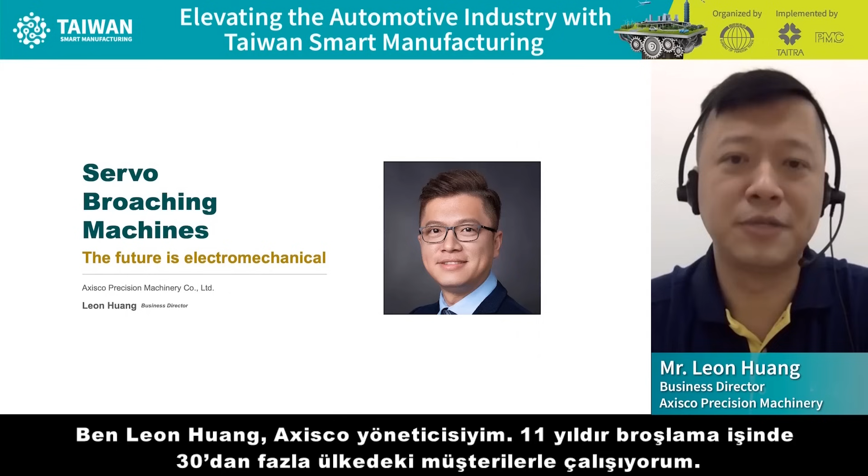Axisco was established in 1984. Now the total area of the headquarters is about 5,000 square meters, located in central Taiwan. We can build several lines together. The models of the hydraulic broaching machine are from 3 to 80 tons. The models of the servo table-up broaching machines are from 5 to 40 tons.

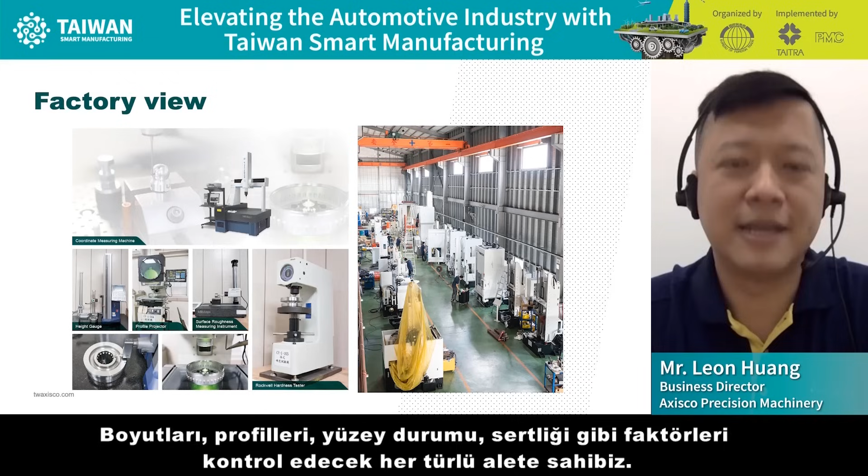In broaching machine, customers approve the parts rather than the machines. We have all kinds of instruments to check the sizes, profiles, surface finish, hardness, etc. We are partners of the suppliers for worldwide big names in automobile, tools and hardware, and aerospace industries.

Axisco's headquarters is in Taiwan. We have a branch office in Michigan, US, and sales channels run by dealers in more than 30 countries.

How to make these shapes? If you are going to make these parts, what method will you use, and how much time does it take? Broaching will be your best choice. It can be used to make round holes, splines, keyways, 6-bolt grooves, square holes, hexagonal holes, special shape holes, helical teeth, etc., quickly and precisely. High level of customization is possible according to various requirements.

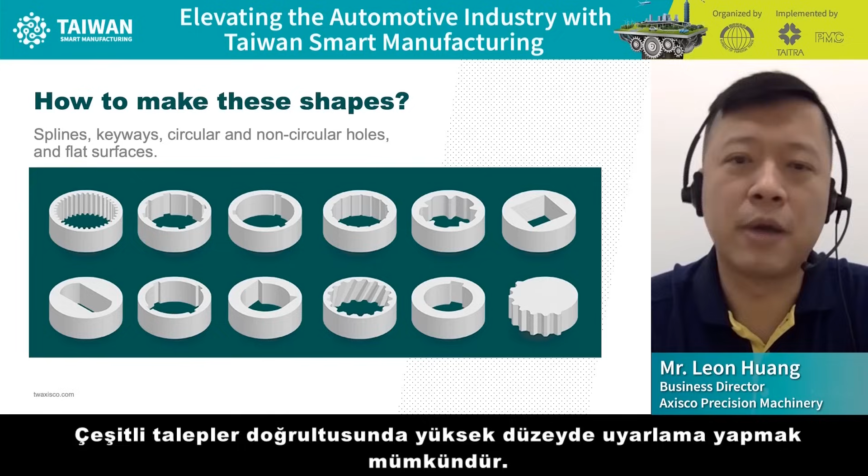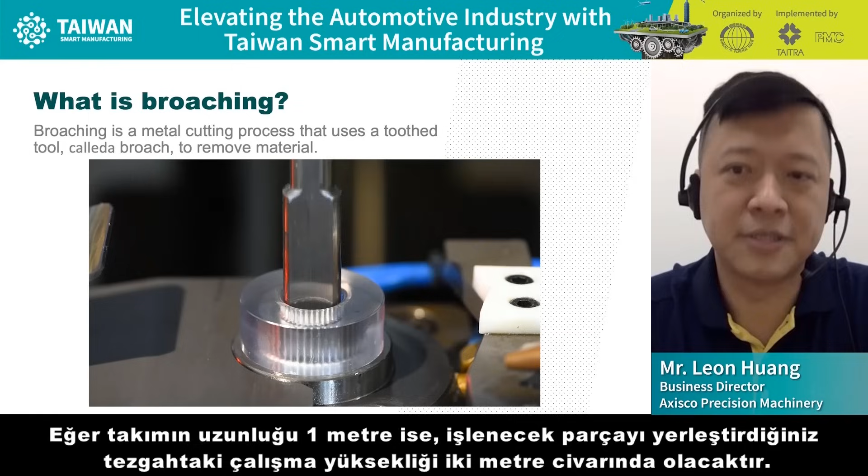What is broaching? In this video, we use a transparent sample to show how the broach tool cuts the spline. The broaching needs to be performed by a broaching machine with a broach. This is a traditional hydraulic broaching machine. The tool moves down during broaching. If the tool length is 1 meter, the working height where you put your workpiece will be about 2 meters, as there has to be room for the tool to go through and space for the pulling mechanism and chips.

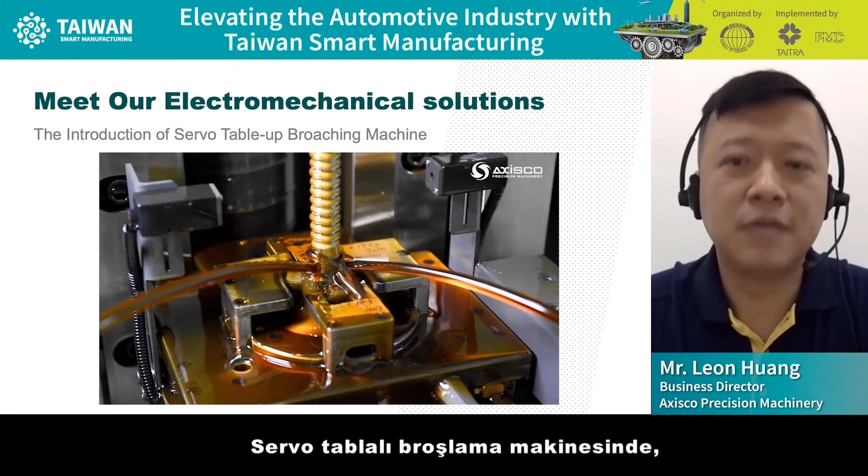Nowadays, people prefer more advanced solutions in every aspect, including broaching. Now, almost 80% of our broaching machine sales is servo table-up broaching machines, the electromechanical solution for broaching. In a servo table-up broaching machine, the tool does not move during cutting, and the working table drives the workpiece to move upward to complete the broaching, as shown in this video.

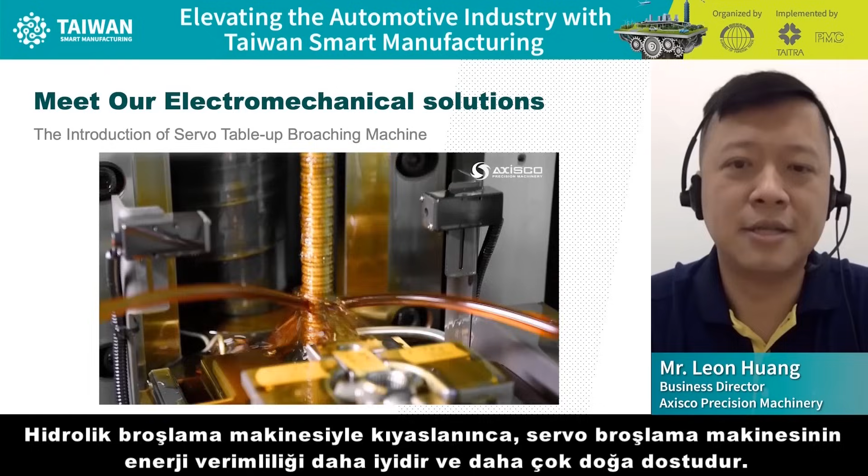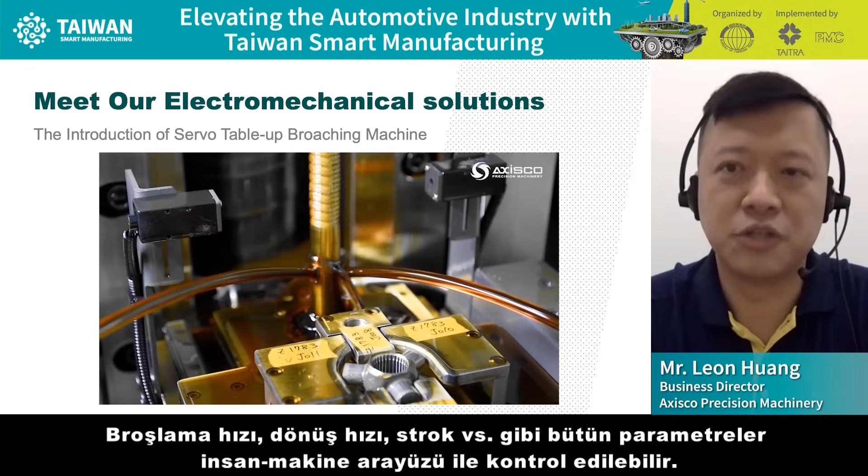This equipment uses electricity as the primary source of power. Compared with a hydraulic broaching machine, a servo broaching machine has better energy efficiency and is more friendly to the environment. All parameters, such as broaching speed, return speed, and stroke, can be controlled through the human-machine interface. The operator only needs to stand on the ground to operate, without digging a pit or standing on stairs. Here we can see the before and after parts.

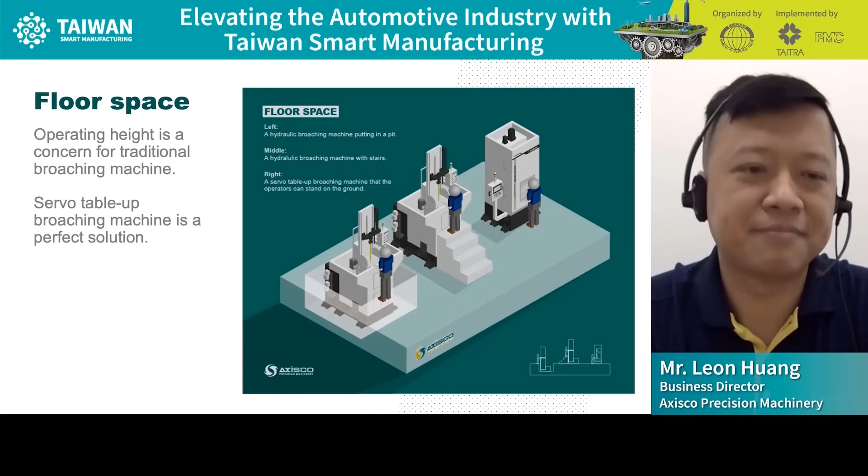In servo broaching machines and hydraulic broaching machines, the dimensional tolerance is all precise. However, if the geometrical tolerance is critical, such as runout, the servo broaching machine provides more stable results, as the broach retriever holds the broach to reduce vibration during broaching.

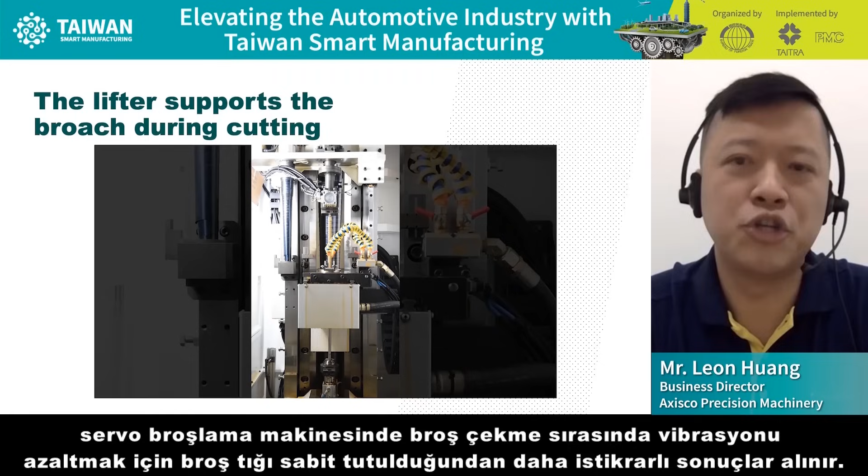The program is 100% made by Axisco. On the right side, the yellow digits tell you the lifter's current position and the job slide, the working table position. The touch panel can operate all the functions on the left side, and the status of the sensors is shown in circles. On the top of this graph, you can save the part number with the tool number in the memory to adjust for the first time. In the future, you just have to recall the memory to start the production.

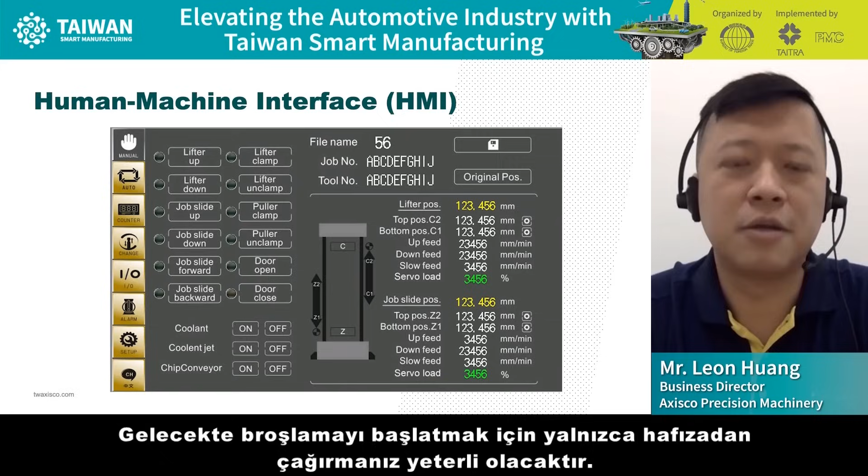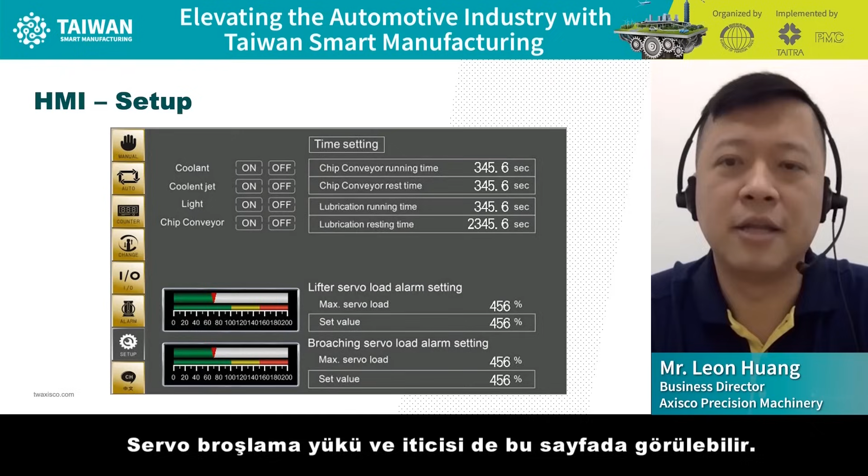The on and off of the coolant pump, tool cleaning pump, light, chip conveyors, and lubrication is a one-touch setting. The servo load of broaching and the lifter are also visual on this page.

Let's make a conclusion to this presentation by looking at the advantages. The working height is the same as other kinds of machine tools. You don't have to put it in a pit or use the stairs for operating the machine. The integration of automation is super easy.

The machine is with a servo motor and ball screw. It performs consistent broaching speed, low vibration, and increases the tool life by up to 20%. Compared with the traditional hydraulic machines, the electromechanical design saves up to 40% electricity. This is because the motor didn't consume power when there is no load.

Even during cutting, the motor only gives the required load, just like how advanced air conditioners save energy in your house. A traditional hydraulic broaching machine is like the old air conditioner that always runs in full load, consuming unnecessary power. If the geometrical tolerance is critical, such as runout, the servo broaching machine provides more stable results as the broach retriever holds the broach to reduce vibration during broaching.

The human-machine interface makes it easy to operate and diagnose the machine. Everything is visualized. Broaching speed and the stroke can be adjusted and saved in the HMI. You can save it in the system and only need some clicks on the touch panel to set a new tool.

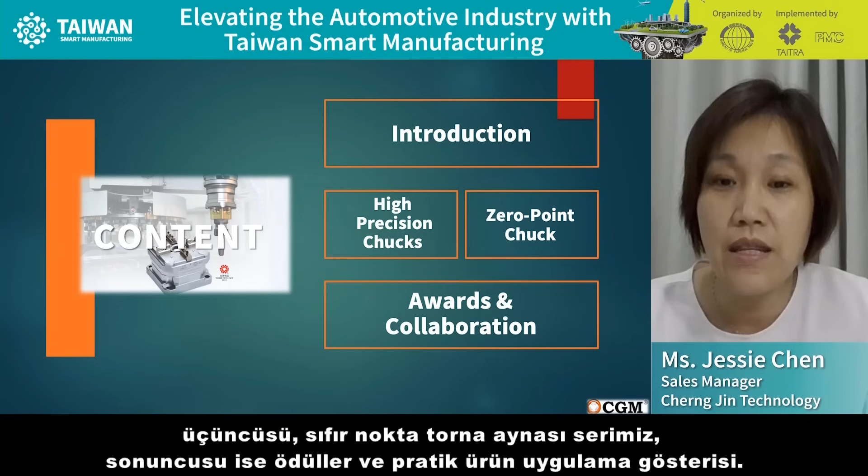In this online introduction, I will divide it into four main sections. Firstly, the brief introduction of company profile. Secondly, the high precision chucks. Thirdly, our zero-point chuck series. And finally, the awards and practical products application demonstration.

We used to be mold makers and knew exactly how important the work holding and clamping products are to the accuracy and efficiency of finished goods. Therefore, we created the clamping chuck in 2004 with 2 microns repetition accuracy, and it can also be compatible with other reputed brands worldwide.

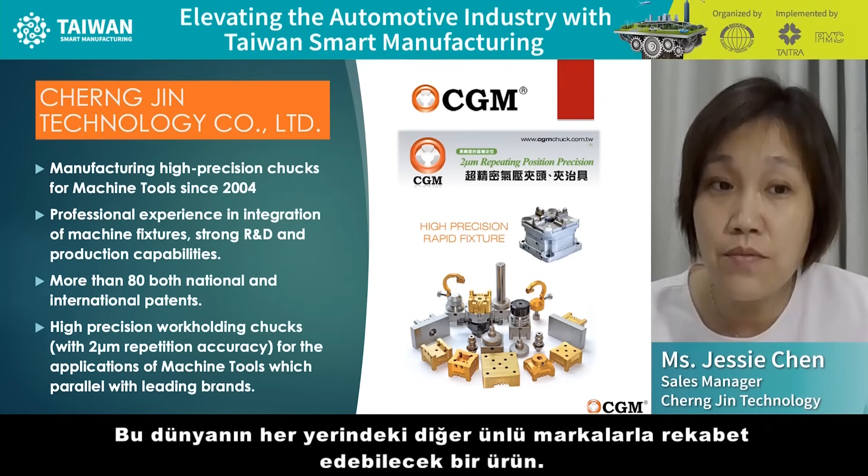Later on, we will show you how our products can be compatible with other brands. Here is the first part, Product Series 1, Workholding Chuck — how our product can be applied to your machining jobs.

There are 3 basic components to the chuck. First, you need to have the workpiece holder, component A as the picture shows on the left. Then you need to have the spigot as component B. And C, you need to have the main chuck.

About the main chuck, our options include manual, quick manual, or pneumatic type, depending on your machine and how you would prefer to operate. As for the workpiece holder, or so-called electrode holder, we have various sizes to fit your specific workpiece requirement.

Next is our product series 2, the zero-point chuck. The general repetition accuracy of our zero-point chuck is within 5 microns. If you are looking for more accurate tolerance, like 2 microns repetition accuracy, we can customize the chuck without problems.

This image demonstrates how you could process bigger size or heavy loading workpieces. We have multiple pallet sizes with 2 chucks, 4 chucks, 6, 12, and 20 chucks available for your choice.

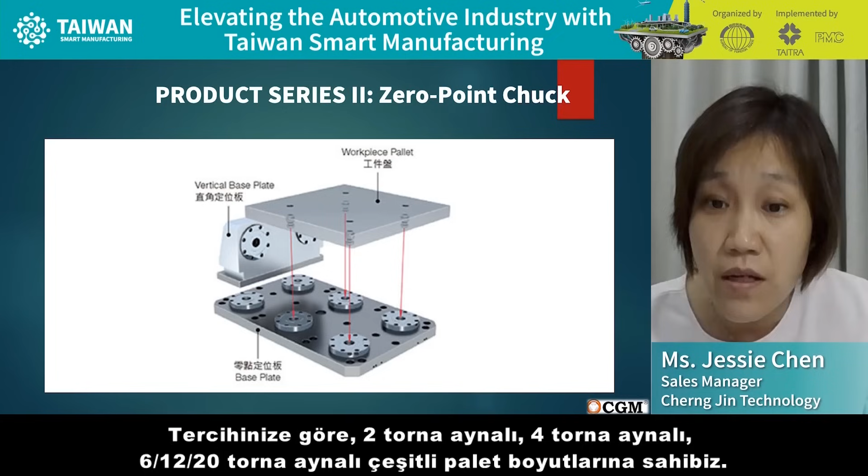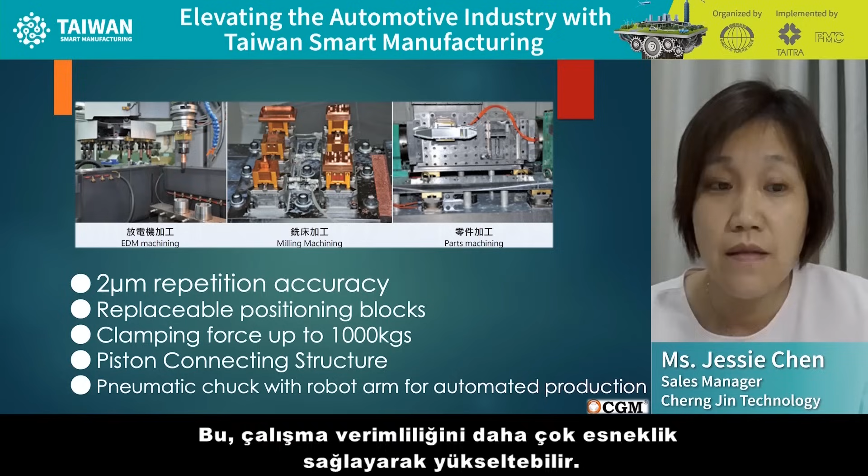Let's move on to the application for machine tools. From this slide, we can see clearly how our clamping chuck can work for all machine tools and make sure the workpiece has consistent accuracy. Consistent accuracy is extremely important for machining jobs, right?

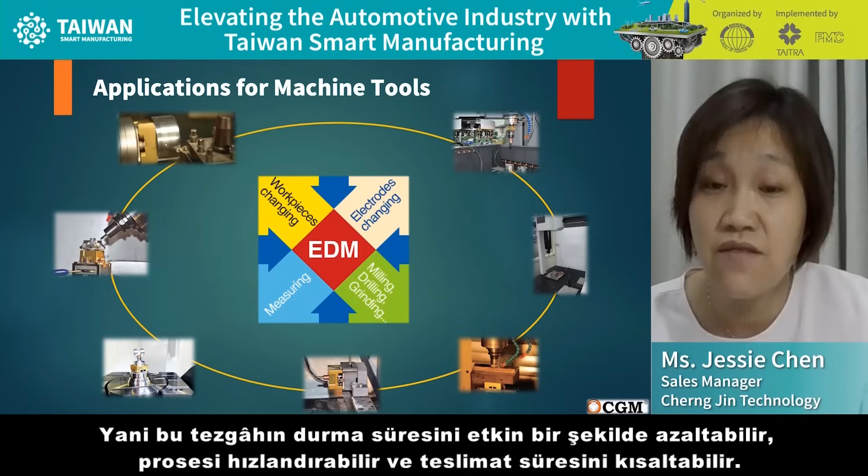So from lathe machining, milling machining, grinding machining, or EDM machining until the last step, measuring, the loading and unloading job can be operated easily with the guarantee of repetition accuracy of 2 microns. It could effectively reduce machine downtime, speed up processing, and shorten delivery time. This is extremely important.

As everybody knows, Taiwan's machine tool industry is reputed in the world. So most reputed manufacturers of machine tools in Taiwan choose to work with us, CGM Chuck, because they can integrate their machines with our chucks to have better performance on machining jobs.

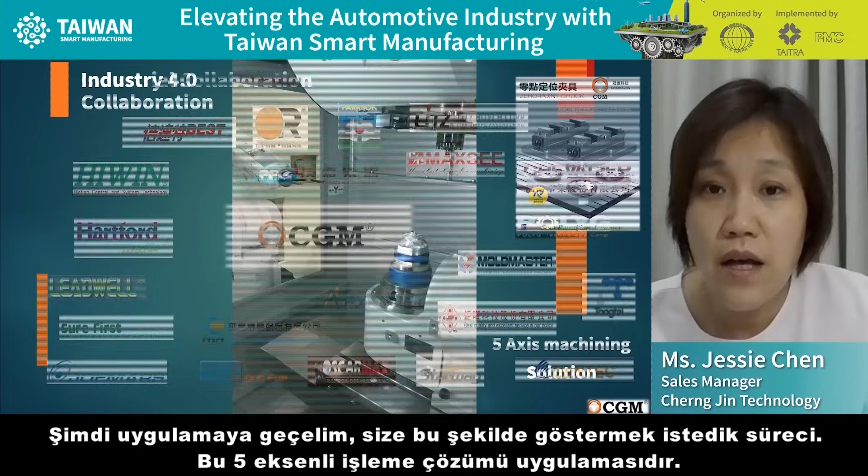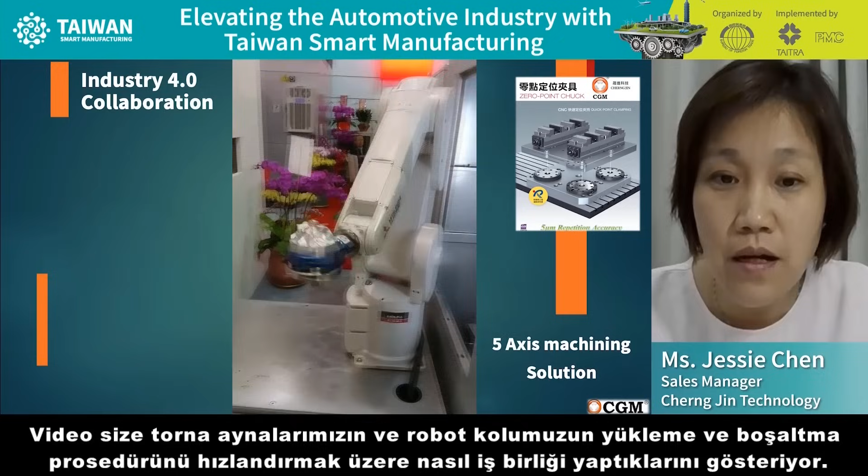Let's move on to the application. Here we are going to show you a demonstration. This is the 5-axis machining solution application. The video shows how our chucks and robot arm can operate together to speed up the loading and unloading procedure. As you can see, the robot arm can easily take the workpiece, loading and unloading within seconds. It will shorten the working time effectively.

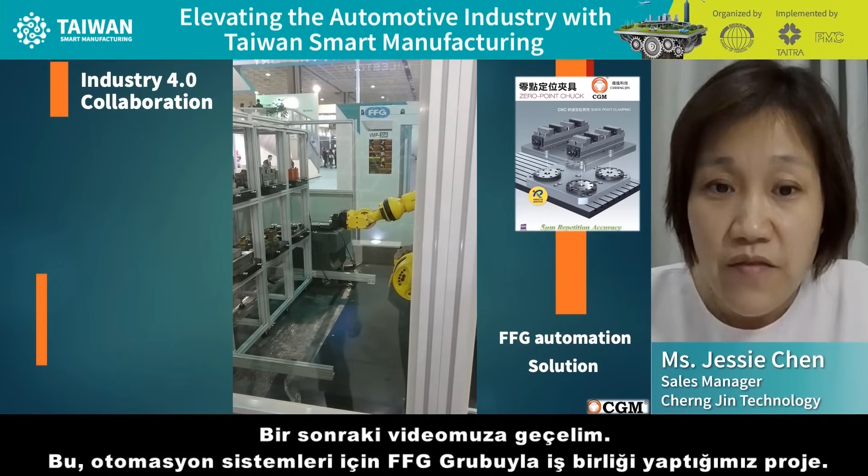Next, we move on to this video. This is the project we cooperated with FFG Group on for their automation systems. They use our zero-point chuck with the robot arm and set up several working stations so that the work can be done 24 hours a day, 7 days a week, 365 days a year. It improves work efficiency and removes the worry about labor shortage.

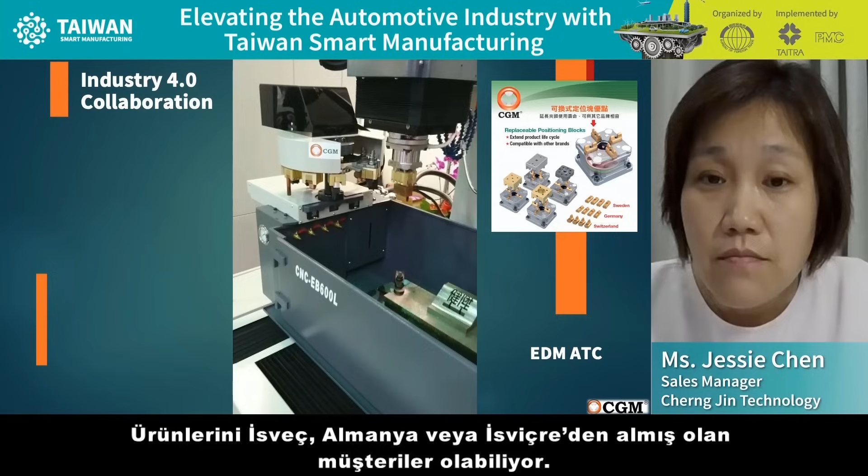Next is the application video about EDM machines. As everybody knows, for reputed EDM machines, customers may be using Sweden, Germany, or Switzerland brands. They already have hundreds of sets of electrode holders, but our CGM chuck can be compatible with their brands. As you can see from the pictures, our positioning blocks can be changed and be compatible with 3 other brands.

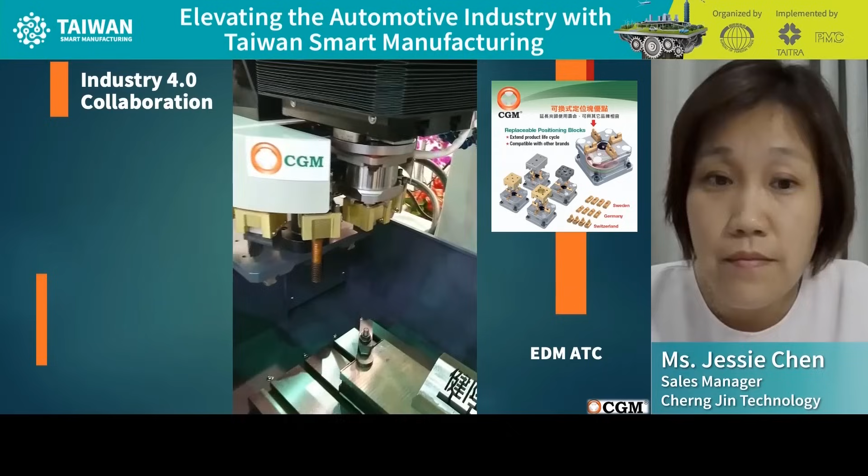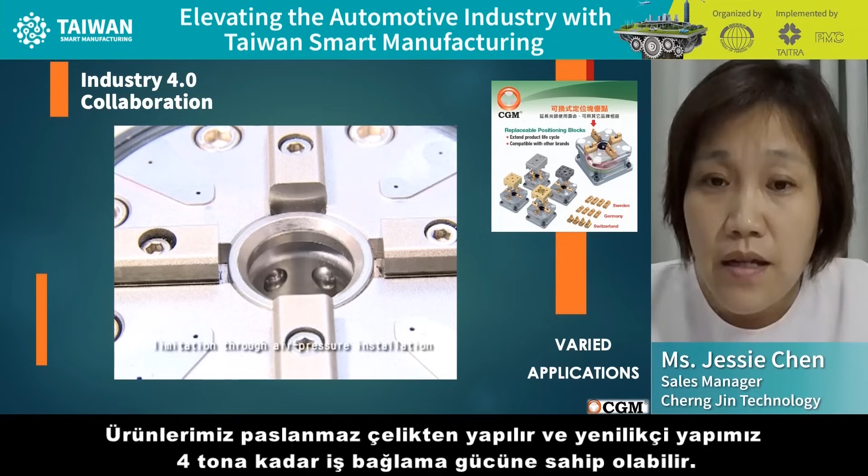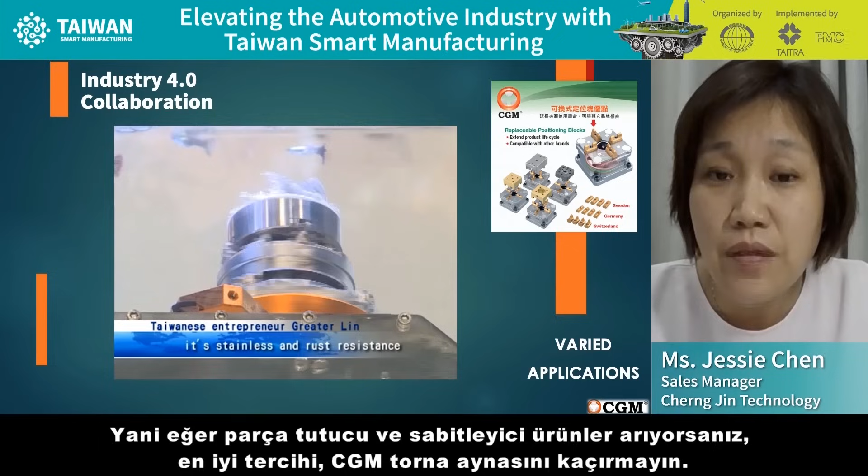Let's move on to the last slide. Our products are made of stainless steel materials, and our innovative structure can achieve a working clamping force of up to 4 tons, applicable to medical, machine tool, or high precision industries. The repetition accuracy and consistent accuracy are extremely important for this kind of high-end product. So if you are looking for work holding or clamping products, please don't miss the best choice here, CGM chucks. If you have any questions or problems, don't hesitate to drop us a message.

Thank you for listening. Some of Cherng Jin's main products include the zero-point chuck, pneumatic chucks, automatic electrode changer, and more. With over 18 years of experience, the company has obtained over 80 patents.

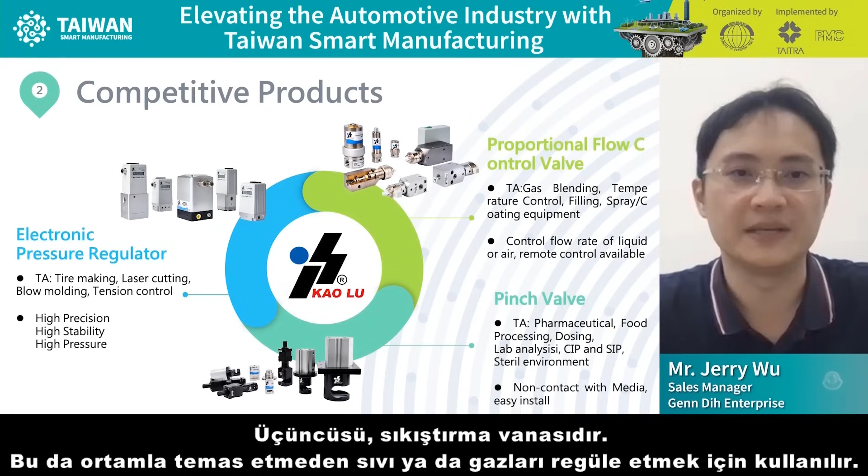Now I will introduce you to 3 case studies where customers use our products to resolve different issues. The products are 2 two-way solenoid on-off valves, a proportional pressure regulator, an air pilot on-off valve, and an air spring. Let me start with the solenoid valve and proportional pressure regulator combination.

Our solenoid valve has the features of being compact, low power consumption, and withstand high temperature up to 180 degrees Celsius and high pressure environment up to 360 bar. The on-off valve is compatible with various media, air, liquid, and also used in vacuum environment.

As for our proportional pressure regulator, it provides the possibility where users can regulate pneumatic pressure through an electronic signal. It has high accuracy up to 0.2% full scale, high resolution, and high repeatability up to 0.1% full scale. The pressure regulator can be controlled remotely via a PLC.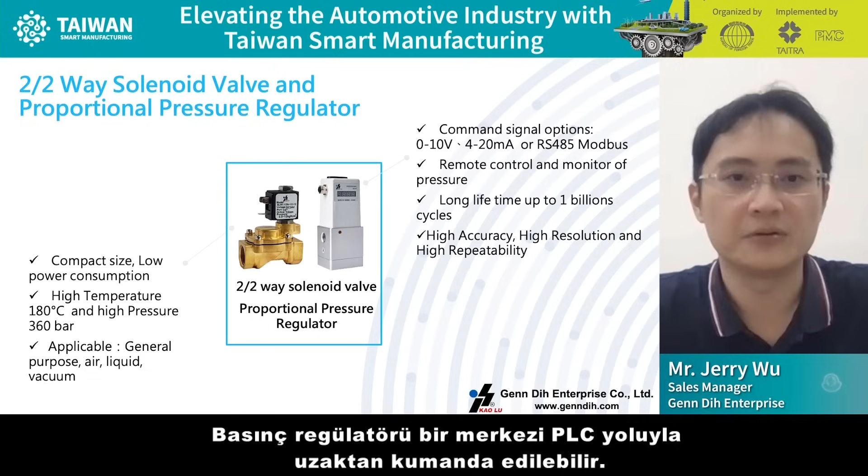In this case study, a customer used a combination of solenoid valve and proportional pressure regulator to control the brake force in a vehicle. Since there is an internal pressure transducer in the regulator, it provides a pressure feedback signal to the PLC. The regulator is used to command the brake force and at the same time monitor the air pressure. Another advantage is that the brake force can now be controlled remotely via a central PLC.

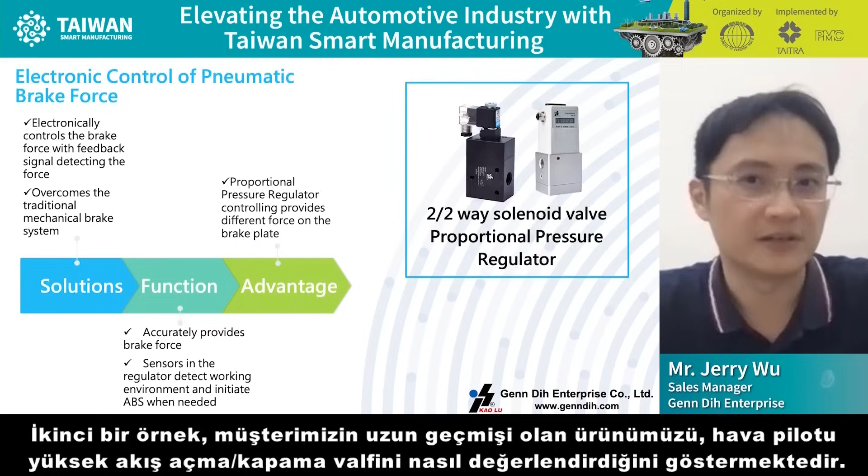A second example is how our customer utilizes our long-history product, the Air Pilot High Flow On-Off Valve. It carries the features that, one, it is corrosive resistant and 100 degrees Celsius temperature resistant. Two, the media it carries can include solid dirty particles without affecting the overall valve performance.

There is a selection of standard 304 body and Teflon PTFE seals available that makes it an ideal solution for running dangerous fluid at high flow rate. The valve currently provides an on-off function with long lifetime.

Our customer used this valve to provide drainage function of dirty liquid coming out from the compressor inside the truck. As our valve is not susceptible to dirty fluid and offers high flow rate, the customer integrates this valve into commercial and industrial trucks.

Our third case study relates to our air spring products. Our spring is used to provide two main functions: one is to provide shock absorption and dampening effect, and two, it provides raising and balancing of a load. It is compact in size and easy for installation.

Our customer has used this air spring for balancing in industrial trucks and commercial vehicles. It is also a very popular product for different testing machines used in vehicle testing.

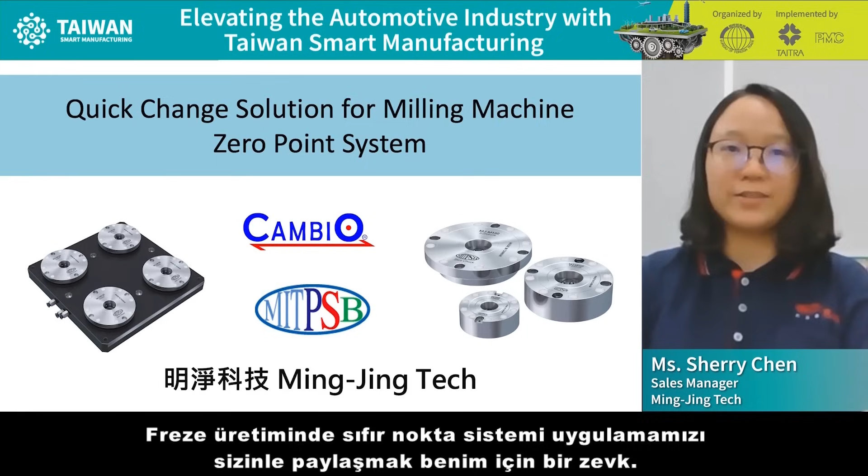I'm introducing our company to you. We were established in April 1992. Now we have 70 employees. Our main export countries are America, Belgium, Switzerland, and Japan. We are located in Taiwan, Taichung City. We are a metal processing team with more than 30 years in the industry.

In order to improve work efficiency and capacity to meet customer needs, we applied automation, equipment manipulators, and the zero-point system for several years, and later developed our own products through research and development.

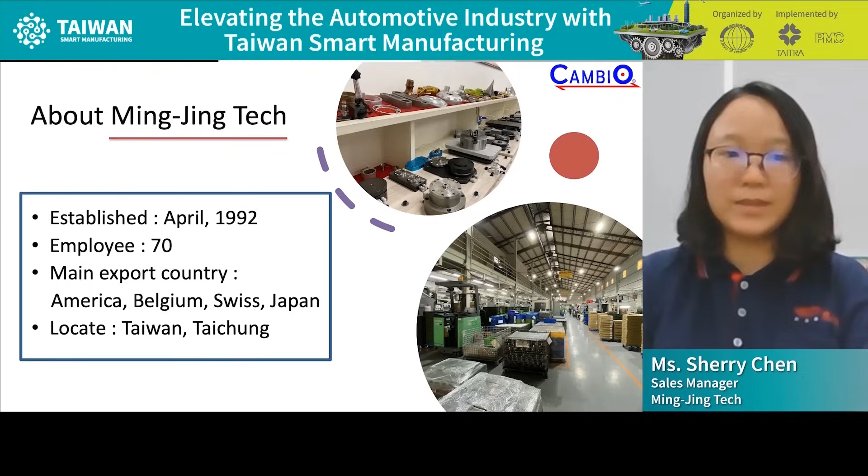Let's talk about the current situation for milling production. First, you might be facing a lack of human resources due to COVID-19. Your employees need to stay at home to take care of their children, or they might get infected with COVID-19 and have to stay at home waiting for recovery. This would be a problem for you if your factory is still producing.

Second, the time for upload and unload varies from working piece to working piece. Some parts are very difficult to upload and unload due to the design of the fixture. It might take one minute to five minutes or even more. Third, the time for setting up the machine varies from person to person. When different types of parts are going to be produced online, the setting time depends on the different person.

What we want to improve is to use standard operation procedures to reduce the time that is wasted, and then we can save time.

This is the schematic diagram of the zero-point system. We put the whole set on the milling machine working platform. We only need to exchange the upper plate with different parts. If you use more than one upper plate, we can save 95% of the time on uploading and unloading working pieces.

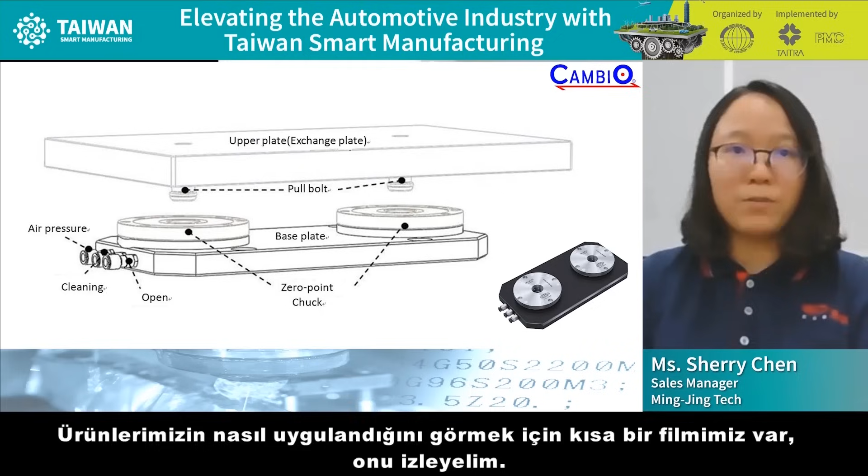Let's watch a brief introduction of our products to see how we apply the milling process.

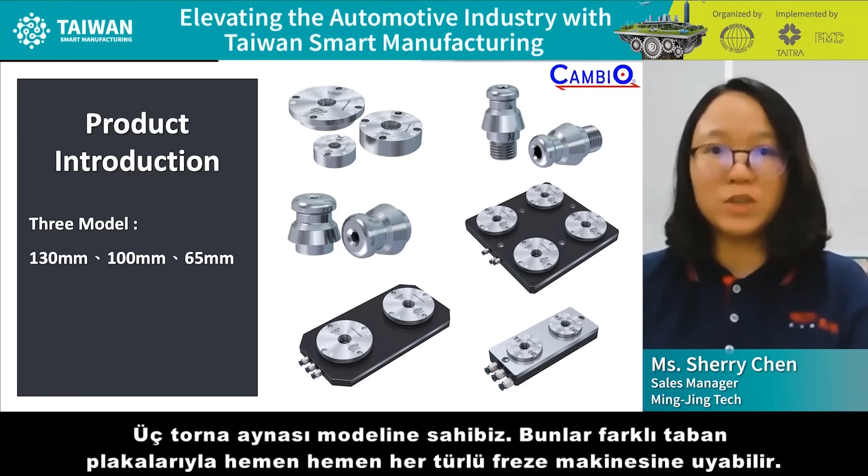Okay, we have 3 models of chuck. Those can almost fit all kinds of milling machines through different base plates. What's the benefit of using a zero-point system?

We have 2 points. First, coping with urgent cases, we can flexibly change the production line. Step 1, change the mode to another urgent case mode. Step 2, change the milling tool. Step 3, call the new processing program. Step 4, after the urgent case is done, put the original mode back. Changing the mode only needs 30 seconds.

Second benefit, standardization of operations for changing mode, so everyone can operate it. Let's look at some actual application cases of our customers.

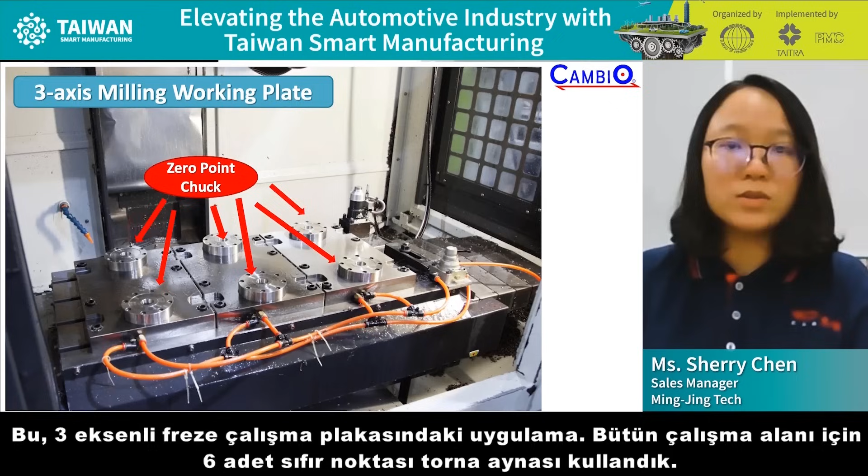This is an application on the 3-axis milling working plate. We use 6 zero-point chucks to replace the whole working platform.

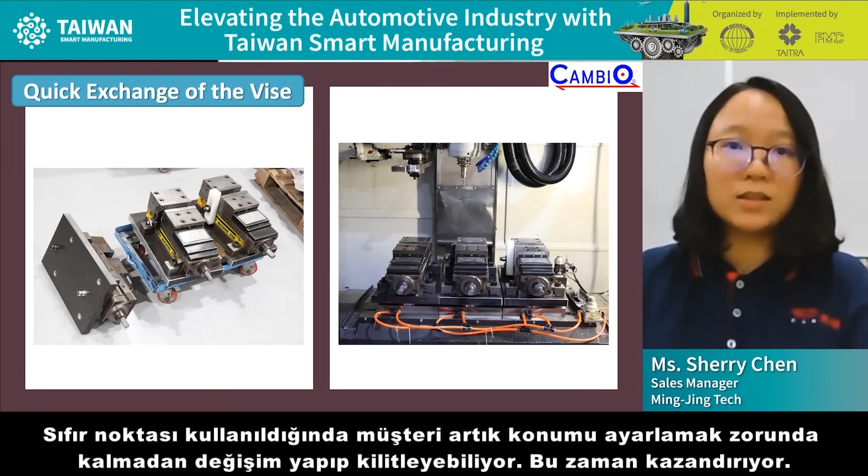This is the application for a quick exchange of vice. After using zero-point, the user can change the vice without adjusting the location again and locking the screw again. This can save time. And this is the application for quick exchange of the scroll chuck.

The user can change the upper plate whenever they want, even with a fixture made by themselves.

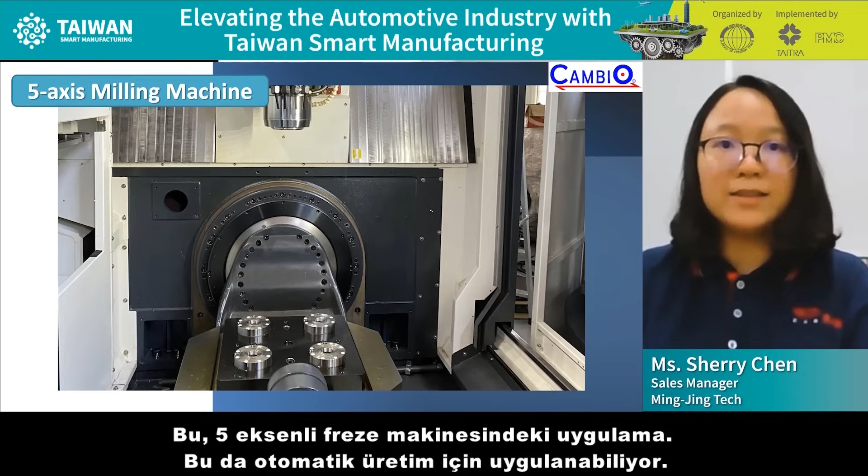This is the application on 4-axis and 4.5-axis milling machines, which can apply with automatic production. And this is the application on 5-axis milling machines, which can also apply with automatic production.

And let's watch another video for the application of manual operation.

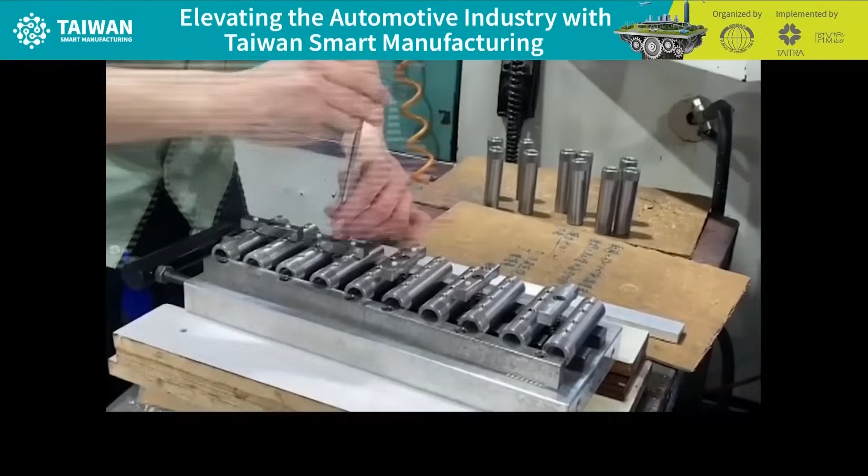Okay, let's watch the video of the application for automatic operation.

This makes it easier for the user to change different types of modes. The user doesn't need to change any setting of the robot arm. Due to the repeat accuracy being less than 0.005 millimeter, different upper plates will go to the same point on the machine in the end.

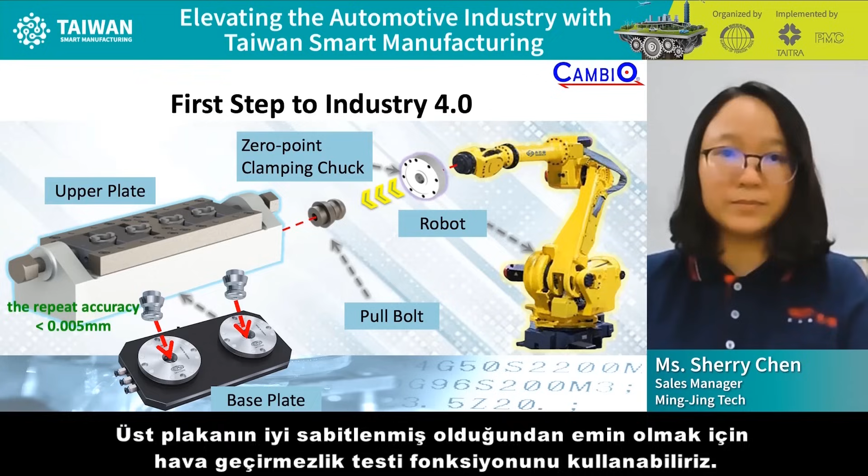As we have learned from Sherry's presentation, Ming-Jing assists customers in planning zero-point clamping systems, bringing convenience to the processing industry. Thank you, Sherry, for your presentation.

Vanessa Chang, Regional Sales Manager at Palmary, will share with us their company's various grinding technologies. They have been in the industry for more than 20 years.

Thanks for having me here. I'm Vanessa Chang from Palmary Machinery. I'm at the Turkey market. Today, I'm going to focus on the value-up solution applied on smart machinery and its benefits to the automobile industry. You will have more pictures in my slides today. I hope you enjoy.

Today's agenda is divided into 4 sessions. First, we will look at the market aspect of Turkey's automobile industry. Second, we will share more concrete solutions for automobiles for your better understanding. Third, with my lead, you are going to have a Palmary factory tour today. Lastly, you are an indispensable partner in the grinding field. Let's look at the first part.

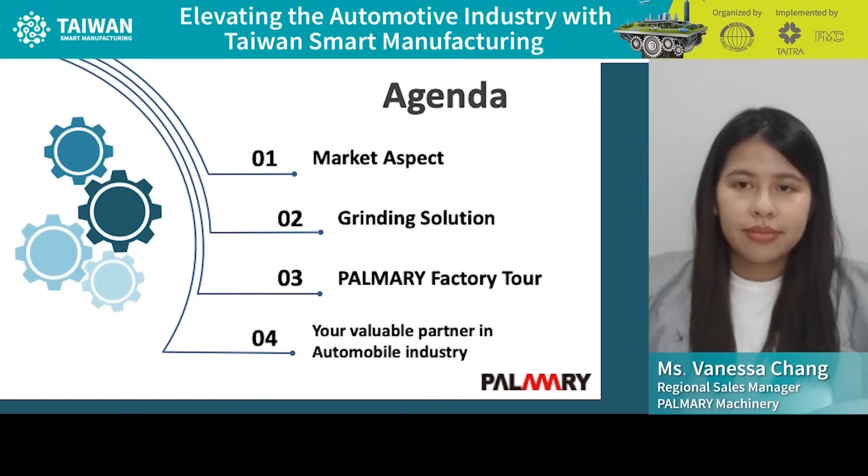Market aspect: the automobile manufacturing kingdom in Turkey. The automobile industry in Turkey is the fifth largest in the European Union and 15th in the world.

In addition to the investment of worldwide representative automobile brands established in Turkey, such as Toyota, Benz, BMC, Honda, there are also lots of investments in the auto part industry by famous foreign companies such as Denso, Bosch, etc. The forecast of growth in the automobile industry in Turkey is increasing.

Of course, the government has positively developed electric vehicles in the automobile industry. The eco-friendly topic has received much attention around the world.

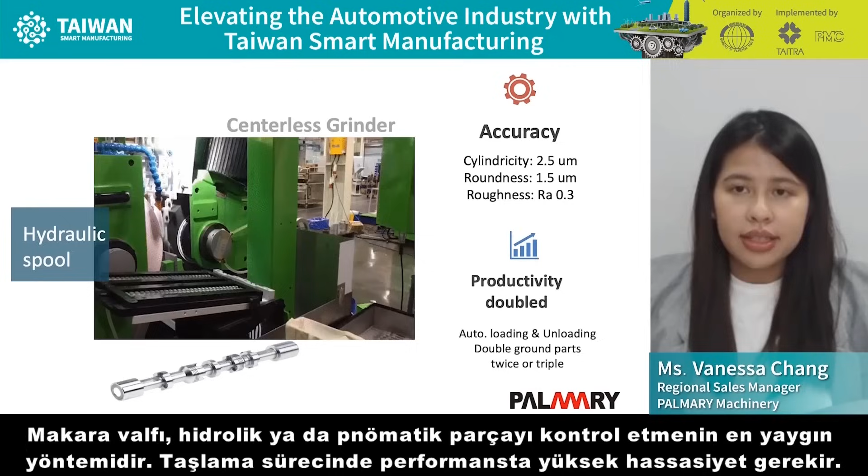Grinding solution: more practical applications in the automobile industry. Spool valve is a common way of controlling hydraulic or pneumatic components. High accuracy performance is required in the grinding process. Based on our experience with centerless grinding machines, cylindricity should be controlled within 2.5 micron, roundness 1.5 micron, and RA 0.3 roughness.

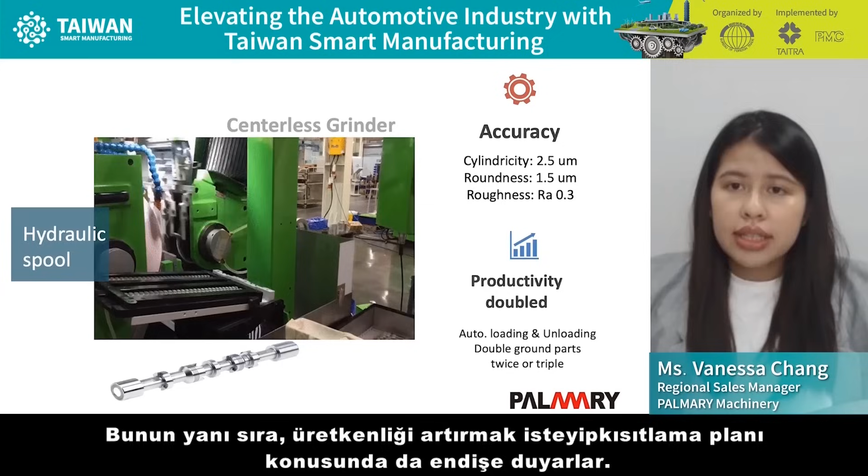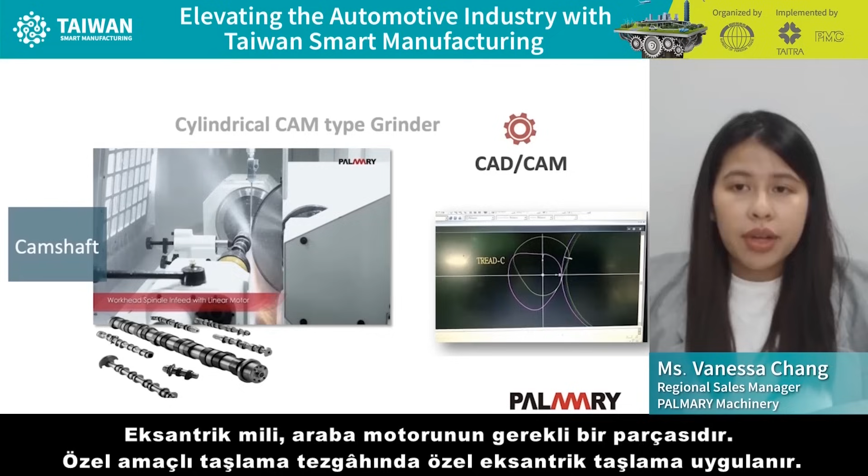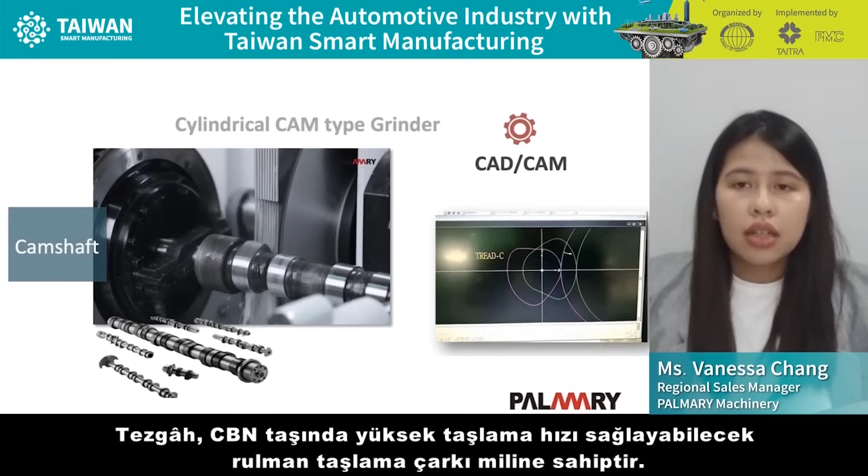Camshaft is an essential part of a car engine. Special eccentric grinding is applied on a special purpose grinding machine. Our Palmary LCD cam series is developed with CAD/CAM software on the controller, making it easy for customers to edit the grinding path and transfer it into a grinding program. The machine is equipped with a bearing grinding wheel spindle, which can achieve high grinding speed of CBN wheel.

Under the development of smart machinery, light-out factory has become a trend nowadays. Thus, we provide customized automation service designed for each part. The automation design is customized based on primary various products.

We have the gantry type, which is combined with full enclosure to decrease 39% of machine layout. Besides, for turnkey projects, robot is applied for the most easy transformation of different production lines, which can elevate 60% work efficiency and decrease 67% labor costs.

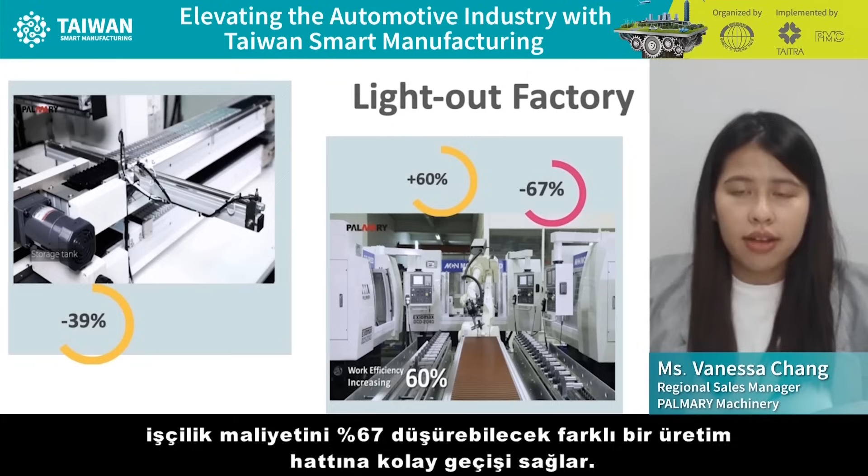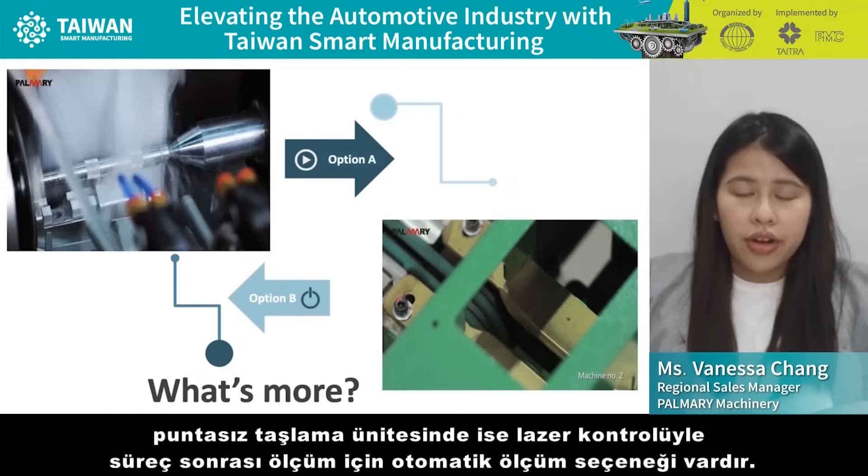What's more, auto measurement is also available to choose, whether in-process gauge on cylindrical grinder or post measurement by laser checking on centerless grinder. The measuring value is able to feed back to the controller for auto offset. Measuring data is collected as a database. It features easy operation with the Palmary-made graphic interface.

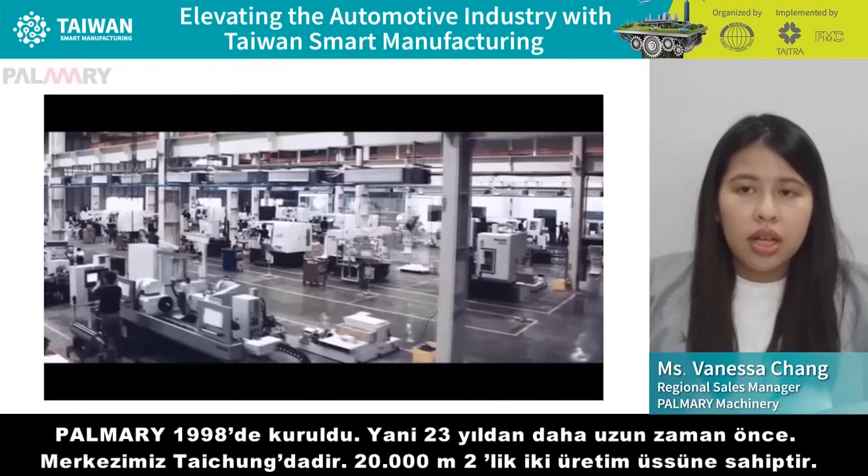Palmary was founded in 1998, for more than 23 years. Our headquarters is located in Taichung, with 2 production bases covering 20,000 square meters. Our teamwork includes QC control, production department, R&D center, and sales team.

Sales status in 2020: sales amount is $20 million in total. Overseas sales account for 83% as majority, domestic is about 17%. Regional sales percentage respectively: China 16%, India 13%, Europe 10%, and North America 11%. There were 290 grinding machines sold in 2020. Among the total, manual and NC accounts for most, up to 64%, and CNC 36%.

Palmary is specialized in manufacturing grinding machines, covering centerless, cylindrical, internal, vertical surface grinder, as well as special purpose machines such as specific use of engine valve stem, eccentric parts, and bearing products.

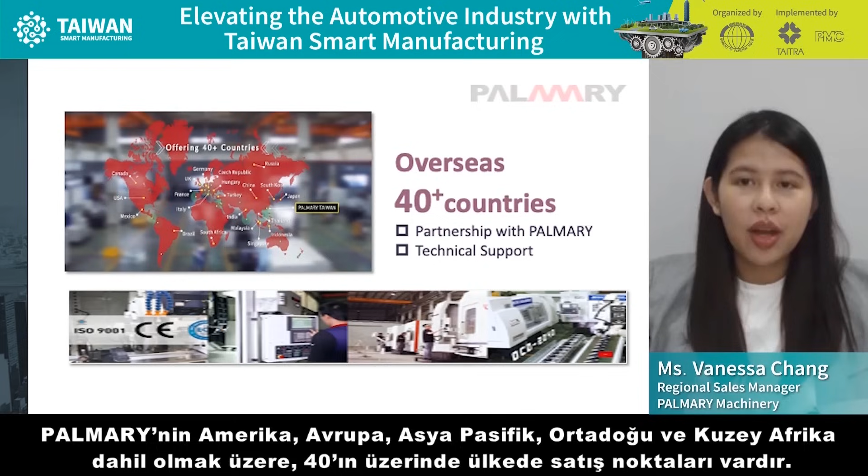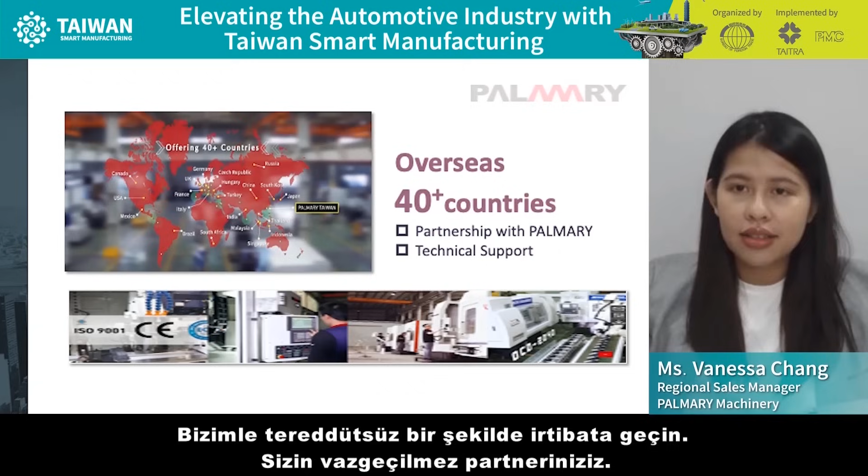Your valuable partner: PALMARY has overseas sales points in more than 40 countries, including America, Europe, APAC, MENA zone, etc. We work with strong partners who are able to provide instant help, whether technical support or sales. You can always take advantage of our advice, know-how, extensive service, and prompt consultants before, during, and after buying our machine. Don't hesitate to contact us. We are an indispensable partner of yours.